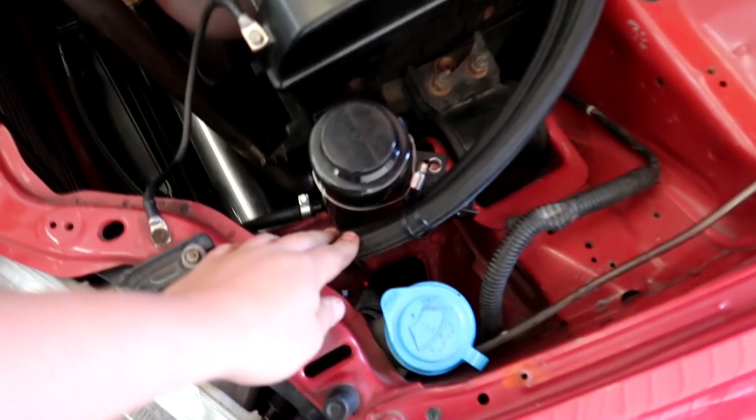Like I said, it's a pretty clean setup. It even has an oil cooler on it. I don't think I've ever put an oil cooler on a B series in my life, but this one's got one. He's going to autocross it. It's got BC coilovers, RPF1s, and it's a pretty clean EG hatch. I really actually kind of dig this thing. Simple, but put together pretty good, it seems.

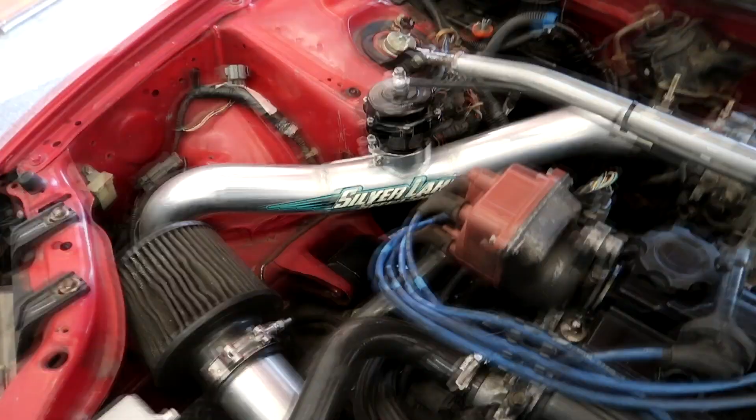4-bar map sensor, Tial gate, all custom intercooler piping here from Silver Lake Speed Shop. If you guys ever look those guys up, it seems like they do a pretty good job. Bumper fits real good. I mean, this thing's pretty cool. So we're gonna dive in. I checked the coolant, it's full. Checked the oil, it's full.

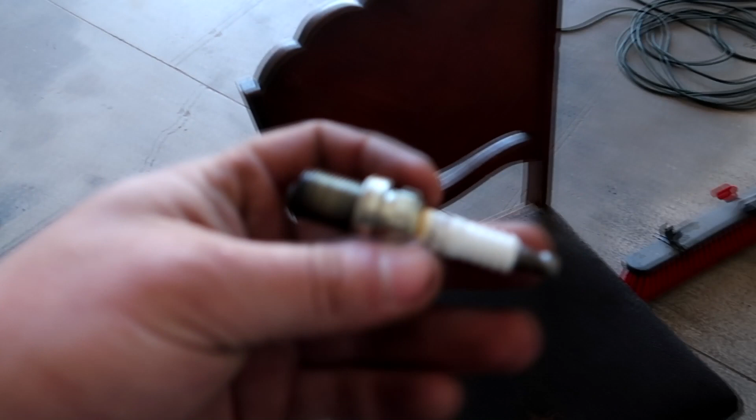And we pulled the plugs out, and it has NGK 4554s, which are the 8s. And they'll work. I'd probably run 7s in this setup, but 8s will do fine. So pulled them out, might whiz wheel them, clean them up a little bit, check the gap, throw them back in, and then we'll get to tuning on Hondata.

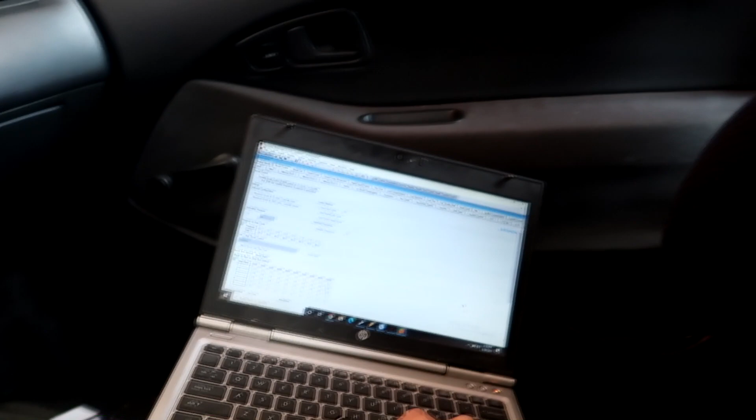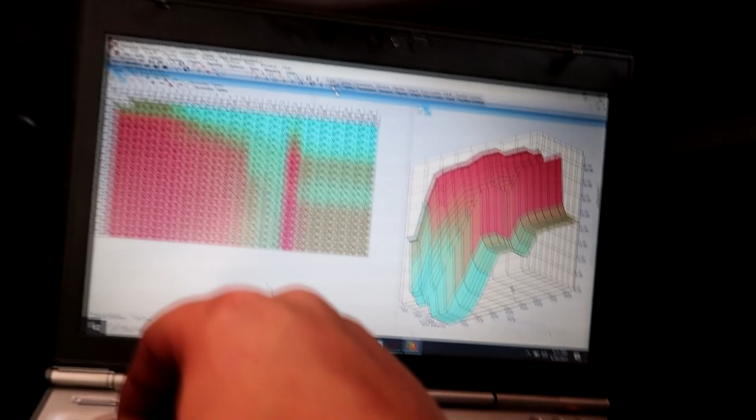So anyways, we pulled up the file here, and I noticed that the car has a 4-bar map sensor on it. But when I pulled the tune file off of the computer, for one, we have to redo this timing map, because this is not how it should be. 15 pounds of boost running 40 degrees of timing. You hear that, Michael? What? 15 pounds of boost on the timing map is at 40 degrees of timing. That's not good. Are we running M1 in this thing or what?

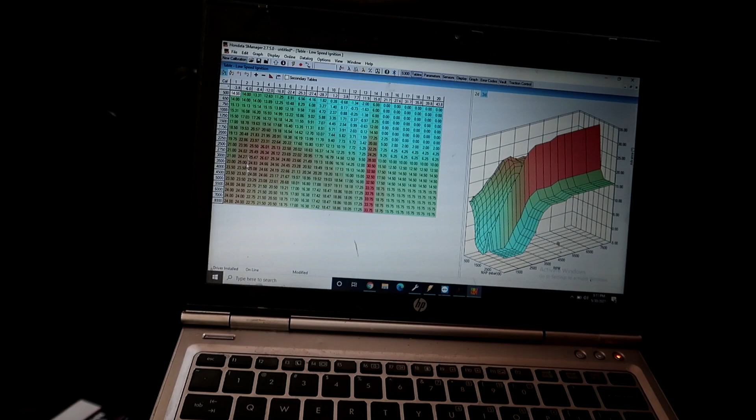Good. Then we might be able to run 40 degrees. But right now, we got to change this up. Make it a little better. Actually, that's on the VTEC side and the non-VTEC side. So, got to make sure that that's all good. This is super low timing cruising too. So we got to probably add some timing in cruising so this thing gets a little bit more of an efficient burn cruising around.

But first we got to change this map sensor here to a 4-bar, because like I said, it's currently set up as a stock one. So I'm gonna type in Honda Omni 4-bar here. We'll hit upload. No other change. We'll get this thing fired up. Make sure we ain't got no check engine light. He said he had a VTEC check engine light, which is kind of weird.

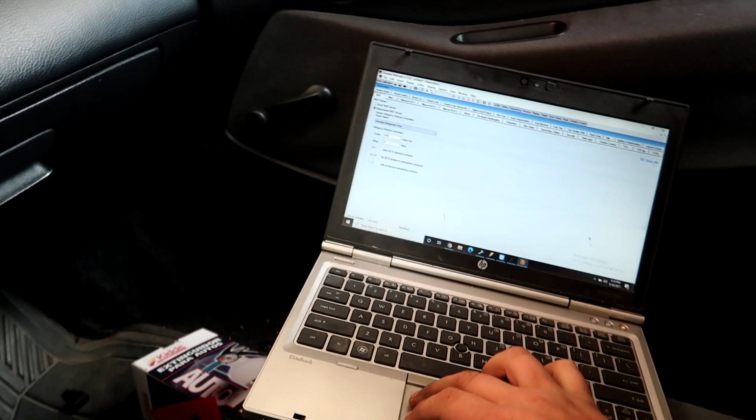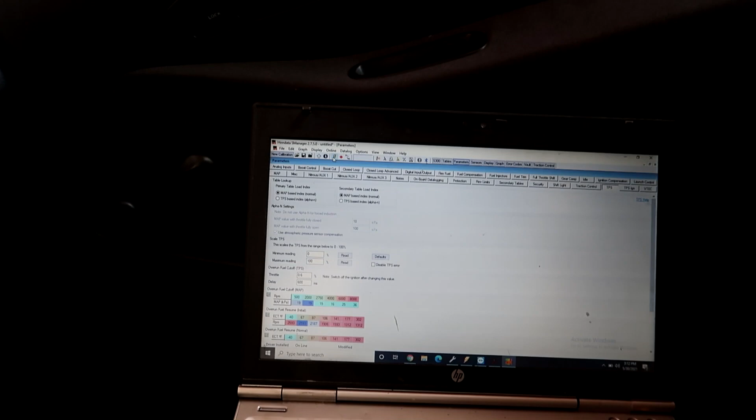There we are. Turn on the data log here. Make sure that we have a proper reading on the map sensor, which we do. We'll calibrate the TPS as well. So we'll go through. We'll start logging here so we can read, and then floor it, read again, and then we'll upload that change.

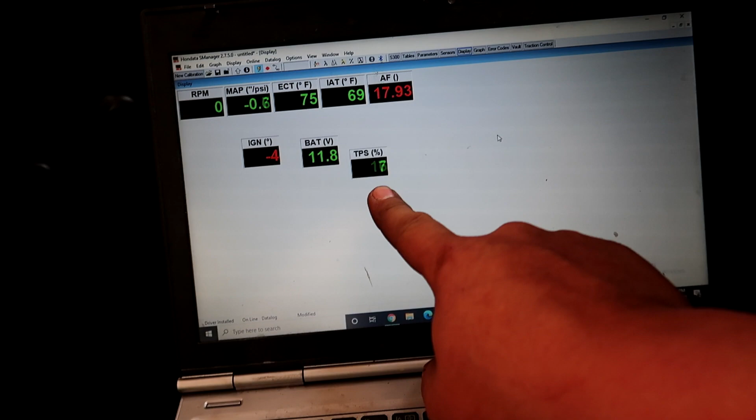We'll go to display. Now we're going 0 to 100 real quick. That's all good. Map sensor's reading good. Now we'll go through, I'll get the map cleaned up a little bit, we'll set the ignition timing, and then we'll do some rips.

Another thing here, closed loop was actually enabled with the stock sensor narrowband. Don't usually ever want to run the stock Honda O2 sensor with a turbo car. They don't really work. If anything, you can just run it closed loop with the wideband if you want, but typically when I tune these things, you can set up temperature corrections and stuff so it doesn't really even need it. It can just run open loop all the time. So closed loop's disabled now.

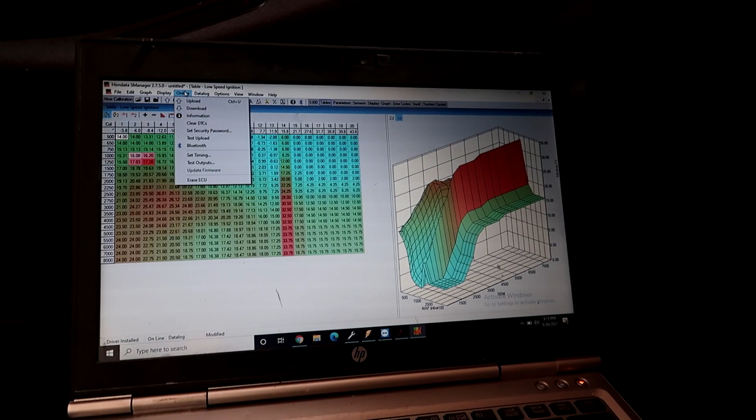This car was street tuned before it came in, but like I said, this timing stuff we're definitely gonna have to figure out on the timing map here. Gotta clean that up for sure. So pick up with y'all in a minute. I'm gonna set the ignition timing here, so we'll go to options, or we'll go to online and then set timing 16. We'll shoot it with a light, see where it's at.

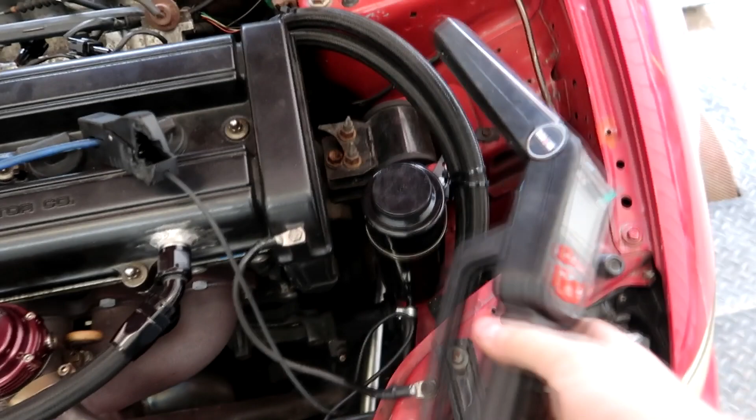Shoot for top dead center. It's right there. Didn't even have to play with it. So now we are getting the gear ratio for the dyno setup, so our tach reads accurate on the dyno.

We're gonna set our endpoint here, and then we'll maybe do a baseline with what's in there once I clean up that one section of timing, just to kind of see where this thing's at. He said it was boost cutting, but had it not been boost cutting, we'll see where it's at right now. Unless it's like super dangerous, I'll get out of it, but I'd like to get a baseline and see what we can do with this thing.

And 400 and some foot-pounds of torque. Yeah, that's not right. Tach must be off still. I fucking reset it. So here we are. This is the baseline on the car. It runs pretty good wide open, but everywhere else is really rich.

So we did make 276 horsepower, 260 foot-pounds of torque. This is on a little over 10 pounds of boost, and pretty low ignition timing. We might try a little bit of ignition in it, clean up the timing at cruising, just try to clean it up a little bit more, and I'll pick up with you on the next pull. I'm just going to run through the map a little bit more.

And also another thing I did was I turned the boost cut up to 15 instead of having it at 8, which it's running 10 pounds, so that's why it was hitting the boost cut. The gate is set higher than what the cut was. So we'll pick up with y'all in a minute. When I get this thing dialed in, we'll do another rip.

Alright, so I did fix up the timing map a little bit, and instead of what this thing was on, around 16 or 18 degrees of timing, we're going to try 20 and see what it does. 20 degrees, see if it picks up at all. Yeah, and then I'm going to run through the fuel map quick and do a rip.

So that run I did put like 2 degrees of timing in it. It lost about a pound of boost because the timing, when you optimize it, a lot of times you cut down on the boost and it cuts down on the restriction of the boost track. And we picked up power by losing boost. So here we are, made 285 horsepower, 276 foot-pounds of torque.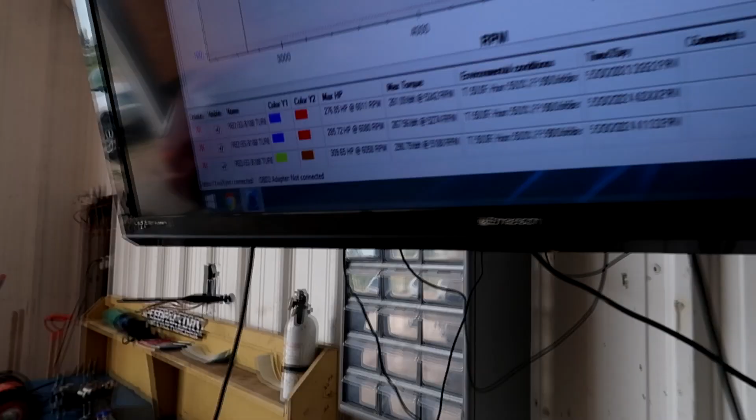All right, guys, so that was like 11 or 12 pounds of boost. We did crack 300. We made 309, 310. Picked up everywhere. Hell yeah, brother.

All right, guys, since there's actually quite a few people on my last couple of videos and they're like, hey man, we want to see some street action of these cars you dyno tune. Well, fine, I guess we'll do that. I actually asked the customer, is it all right if we take the car out for a little ride around the block just to kind of show the viewers what the car is all about? This is a 300 wheel horsepower B18. So we'll do a little rip for you guys.

Second gear pull. Certified ripper.

All right, guys, so EG hatch, all good to go. 300 wheel horsepower and great suspension setup on it. It's got BC coilovers, good tires. It just shits and gets. It's a great street car. Me and Michael were actually just talking about how fun it is just because it's torquey. It's got a big power band. It's fun. So don't oversize your turbo.